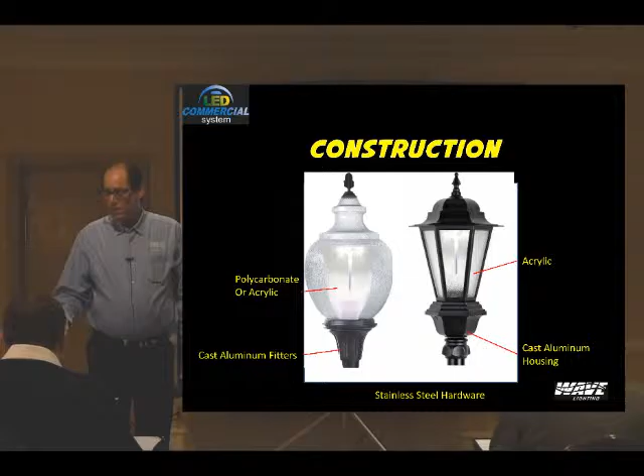Let's look at the construction of the WAVE fixtures. On the Acorn, we have a polycarbonate or acrylic globe, cast aluminum fitter. On the Lantern, we have a cast aluminum housing and acrylic lenses.

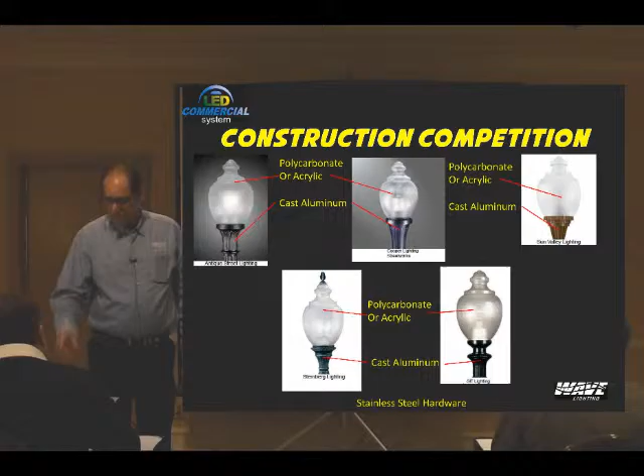But let's look at the competition. These are all the major competitors that you see out there. We have polycarbonate or acrylic globes, cast aluminum fitters. Both of us have stainless steel hardware.

Now we do have competition from the LED retrofits. And we're going to talk more about the LED retrofits in just a minute. Promoting commercial LED luminaires is different than residential. Showrooms sell design appliances that produce light.

Customers don't walk in a showroom and look at a chandelier and ask, how many foot candles will be on my table? Commercial outdoor lighting must complement the exterior design, and it has standards of functionality. Function is measured by photometry.

Photometry is the science of the measurement of light in terms of its perceived brightness to the human eye. Lighting levels are measured in foot candles and lux. Not so much lux, lux is more European. But 0.1 foot candle equals 1 lux, 1 foot candle equals 10 lux.

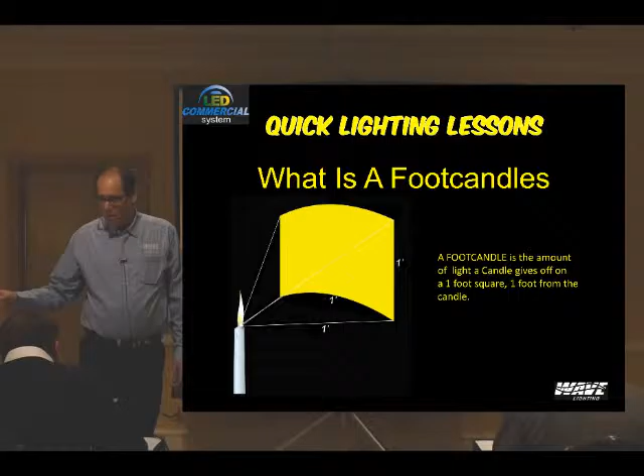Why photometrics? Safety, lawsuits. Photometrics are important. Architects and engineers demand them. Understanding photometrics makes the sale easier. Your knowledge of photometrics is paramount to success.

The Illuminating Engineering Society, IES, sets the recommendations for all indoor and outdoor lighting. Most projects must meet their requirements. Additional codes by state, county, and cities may exceed IES recommendations.

Architects, engineers, and cities may require a photometric report. Sometimes simple isolines and luminaire test results work. Sometimes a point-by-point layout showing the foot candles is required.

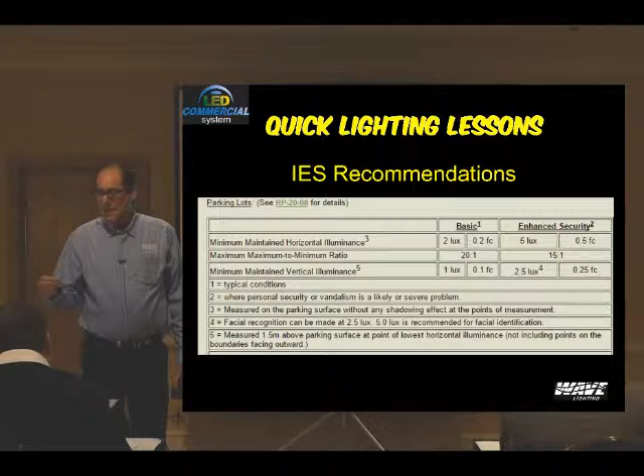The IES recommendations. We start with the basic. And when I say basic parking lot, we're talking about a very small apartment parking lot, and the recommendation is 0.2 foot candles minimum and a 20-to-1 max to min. Most of your parking lots are going to be minimum of 0.5 with a max to min of 15-to-1. So minimums are really going to range between 0.5 and 1 foot candle.

Max to mins must be as low as possible. The more even the light is, the less the eye pupil must adjust. With HID lighting, you get a tremendous amount of light going straight down below the pole. So your pupil closes. As you walk away from that post and the light gets dimmer, it now must adjust

and go up. If you have even lighting, like this room is right now, you can maneuver very easily because the pupil basically stays at one position. So low max to min, even lighting is superior to high max to mins.

To do a point by point, the following must be known. Got to know the pole height, the light source you're going to use, the luminaire locations. Or we can design a layout. But again, we need to know what's the post height, what's the light source, luminaire minimum foot candles required, any codes concerning the post height, lumen maximum, light trespass, etc. We need all this information.

Point-by-point photometric software uses AutoCAD DWG or DXF drawings. All jobs are done using AutoCAD, and they all can generate the DWG or DXF drawing and email it to you, and you can email it to us. We can do it and have done it off of PDF. The problem with the PDF is when we scale it up, the dimensions are going to be off a little bit, but we can do it.

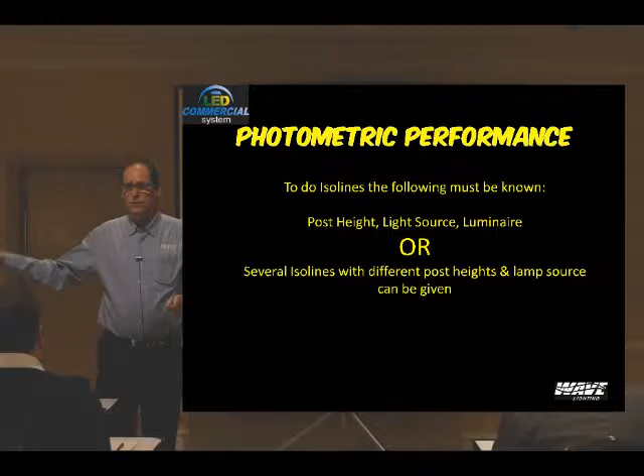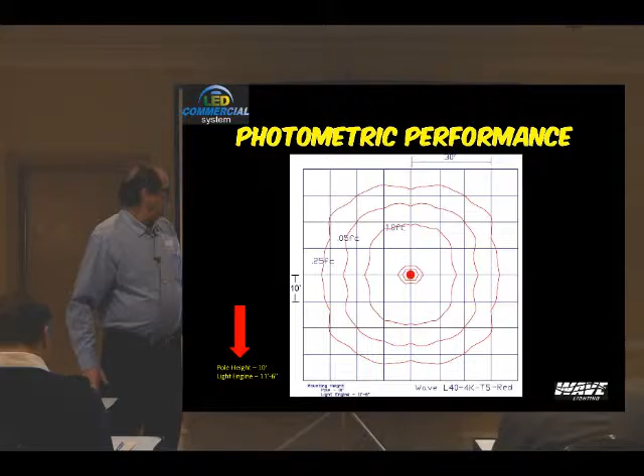But the real question is, how does the Wave LED commercial truly perform? Well, let's take a look at some isolines and point-by-points. This is our Type 5 40-watt LED unit, and you can see we're going out 30 feet away from the post to 0.25 foot candles. So that means to get that half minimum we talked about, the next post needs to be 60 feet away. Well, that's a great distance. Call that 6-to-1, mounting height to spacing.

Typical parking lots, 4x4; good fixtures, 5x5. We're going all the way out 6x6. That is great spacing. Now, the pole height in this case is 10 foot, but the light source is up 1.5 feet. So when we run the photometrics, the light source is running 11 feet 6 inches. You can't believe the number of jobs that are done at the wrong height because they're not taking into account where the light source is from the top of the post.

And now as we jump to our 60-watt LED unit, we're going out 38 feet 6 inches, so the next post for half-foot candle is 75 feet away. Again, that's a tremendous difference, and that can lower the cost of the job by using less poles and fixtures. That's all well and good, but everybody wants to know, how do you stack up against HID?

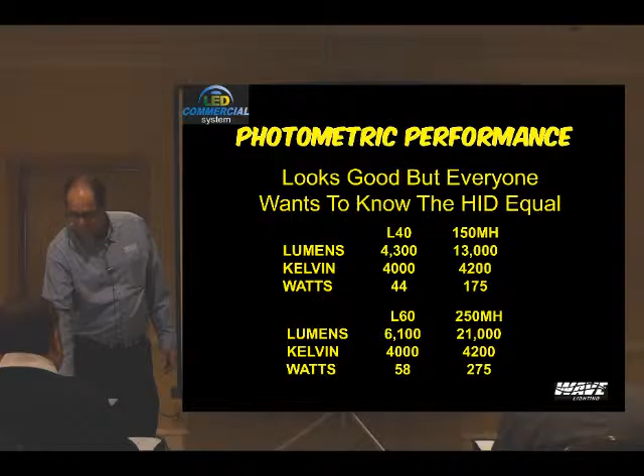Well, our 40-watt unit produces 4,300 lumens. 150 watt metal halide, 13,000. Kelvin temperature, we're at 4,000. Metal halide, 4,200. Watts, we're only at 44, while the 150 watt metal halide is at 175. On the 60 watt LED unit, we're at 6,100 lumens. The 250 watt metal halide, 21,000. Kelvin temperature the same, 4,000 to 4,200. Watts, only 58 against 275. But how can 1/3 of the lumens equal the same light on the ground?

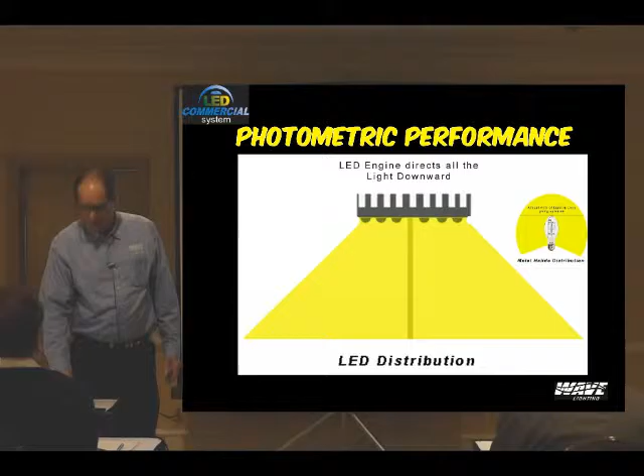This is how a metal halide lamp works. It basically throws the light out 360 degrees, vertically and horizontally. All that light going up, which is approximately 40%, goes up to the sky. You don't need it. Oh, you also, by the way, have a point source. That little bubble in the lamp is called a point source. It's going to become important later. Don't forget that point. On our LED, all the light's going down. That's why we can use less lumens and get the same amount of light on the ground. And there's your comparison between the two.

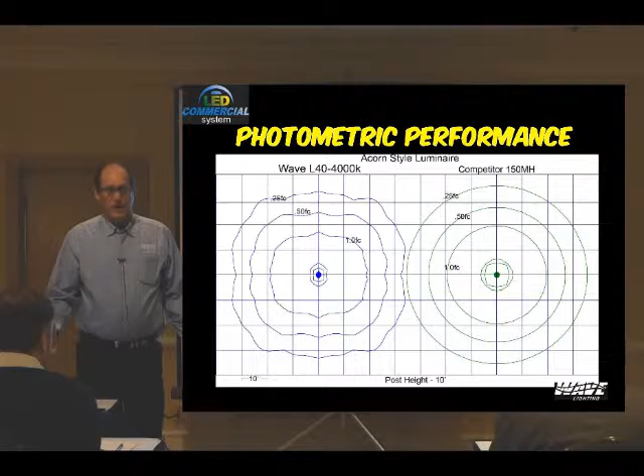But the real proof is running isoline photometrics and comparing. On the right, I have a major competitor with a 150 watt Acorn luminaire. On the left is our 40 watt LED unit. They're both at 10-foot height. When I do an overlay, you can see they're virtually identical.

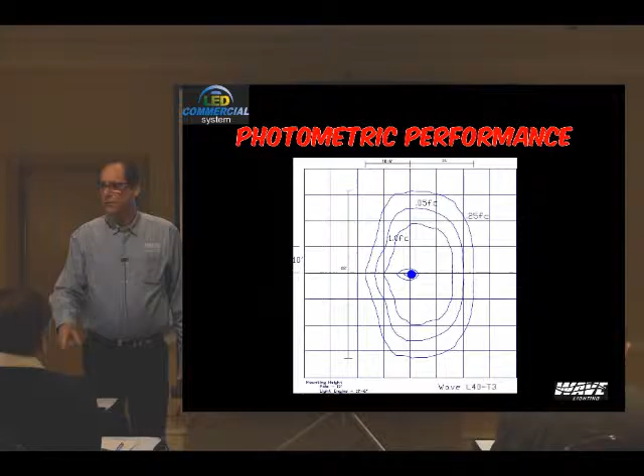Now this is our type 3 distribution. It's not a good type 3. It doesn't go out far enough away. It's fantastic distance side to side. We're getting 62 feet, which means the next post for that half-foot candle needs to be 60 foot away. It's closer to a type 2, but it is a great item to use when you have a driveway. You got a multifamily, you're driving in. They're narrow, sometimes 20 feet. That's great optics for that. You're not getting a lot of light trespass.

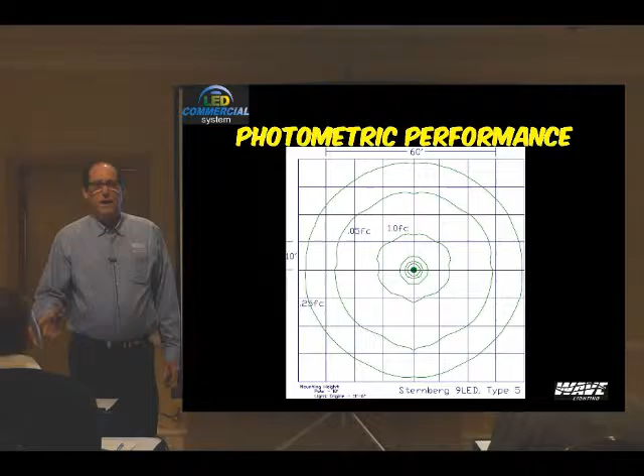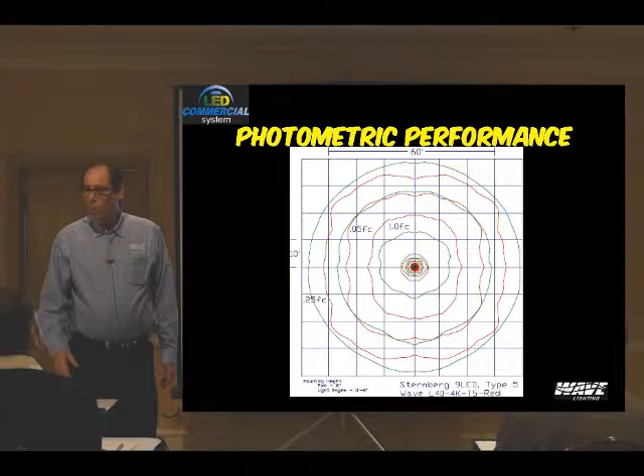But you got to compete against other people out there. So how do we compete against the best of the best in the marketplace? Great question. I'm glad you asked it. So this is a major, well-known, very respected competitor. This is their approximately 40 watt LED unit. I do an overlay of our unit and you can see quickly that on the 1-foot candle isoline, which is on the inside, we're a little bit better. On the half-foot candle, we're almost identical. On the 1/4-foot candle, they exceed us a little bit.

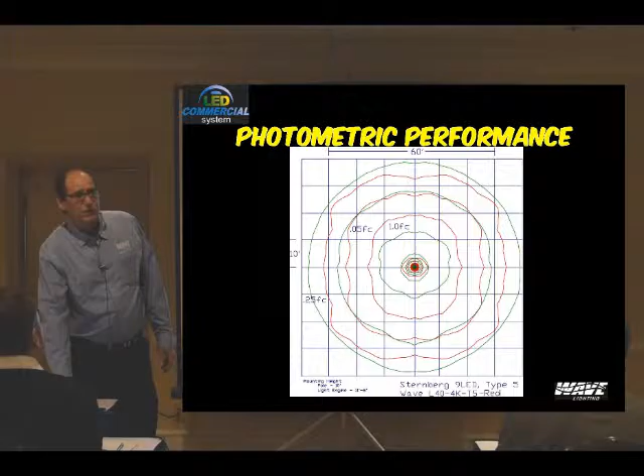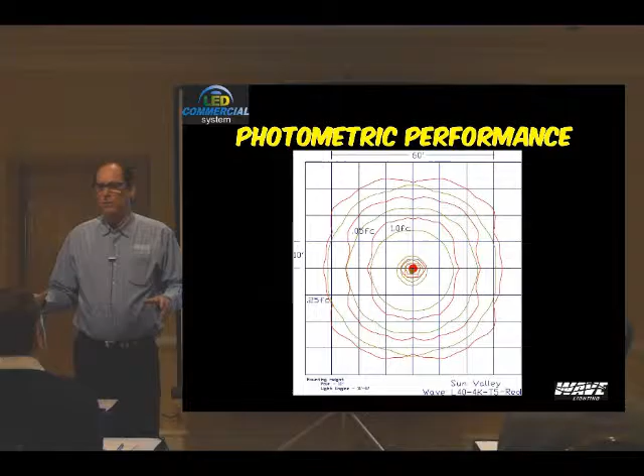Took it one step farther. Another national competitor. This is their type 5, approximately 40 watt LED unit. Do our overlay. Again, on the 1-foot candle, we're a little better. Half-foot candle, we're better. And the 0.25-foot candle, we're better. But you put any one of those three on a plan, and they're virtually going to come out identical. They're that close. When you look at it one-on-one is where you see the difference. When we have multiples, you get all the other contributing light, and they're virtually going to be the same.

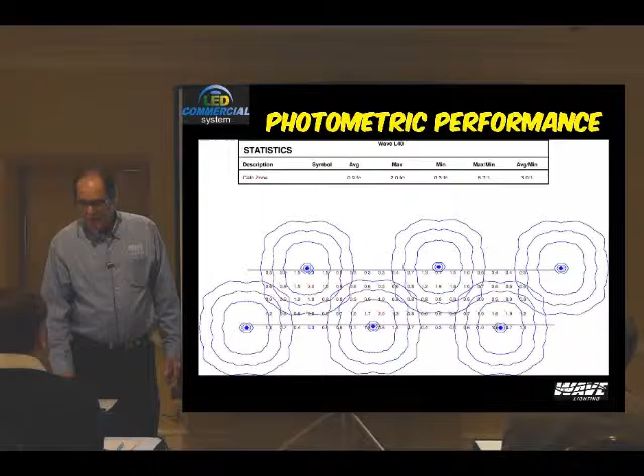Here we did a little street lighting. It's 40 feet across. Ran 6 units. This is with a metal halide unit. We're getting an average of 1.3 foot-candles, max 5.2, minimum 0.4. Ran our 40 watt unit. We're getting an average of 0.9, max of 2.0, and a minimum of 0.3.

But let's stack them up next to each other. The Wave unit, 0.9 as I mentioned. The metal halide, 1.3. Your eye can't really tell the difference between the two. On the max, we're at 2.0, they're at 5.2. Remember we talked about that max to min? We're 2.5 times better. The minimums, 0.3, 0.4, you can't tell. The eye can't see that.

Max to min, because of the max, we're at 6.7, they're at 13. We're almost twice as good, better than the metal halide unit, because the metal halide dumps the light straight down. We're using 1/4 of the energy and better lighting.

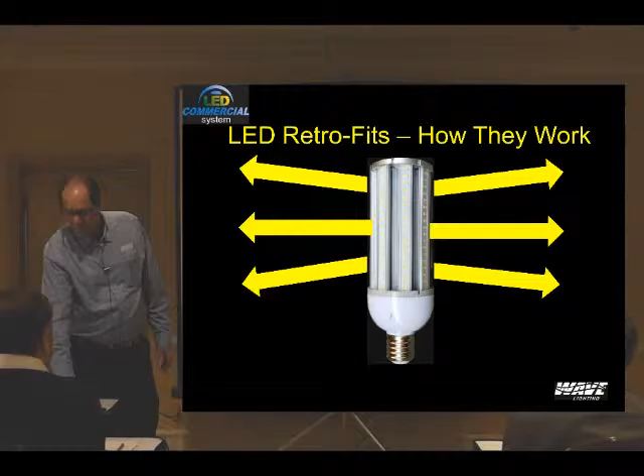The LED retrofits, very popular. A lot of you have sold thousands of them, have made nice money on them. How do they work? They shoot the light straight out. The only difference between them and a metal halide is there's very little light going above 90 degrees. But where do we want the light? We want the light going down. Light should go down so we get the good foot-candles. That's what people see. They don't walk up at 10, 12 feet in the air.

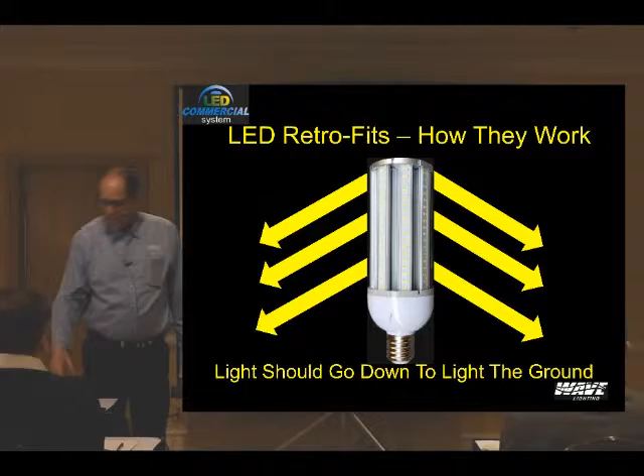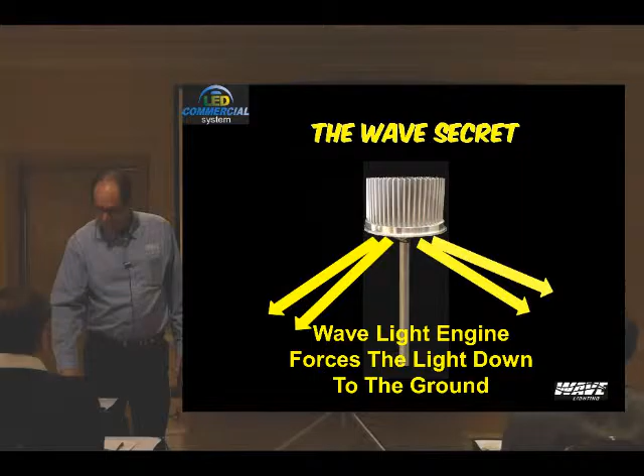The Wave Secret, there's our module. Again, all the light is going down. Now, we use superior optic control, ultra-high output LEDs, and we have quite a large heat sink to mitigate the heat out of the unit. Our standard is 4,000 K. We do offer 3,000 and 5,000 options. 5-year warranty, multi-volt driver, 100 to 277.

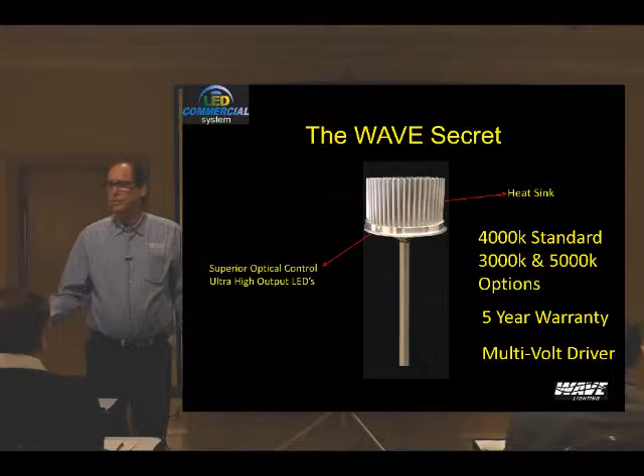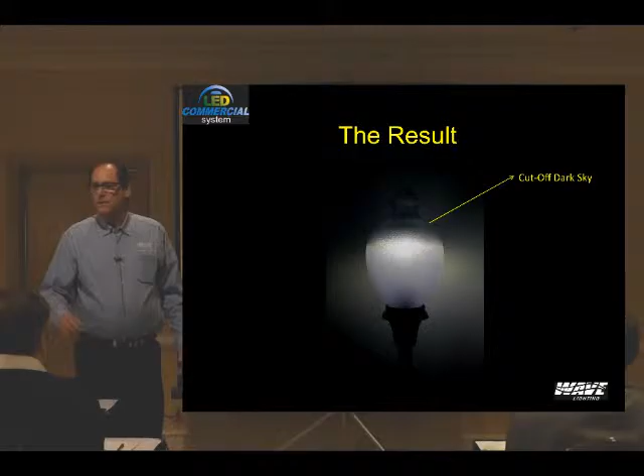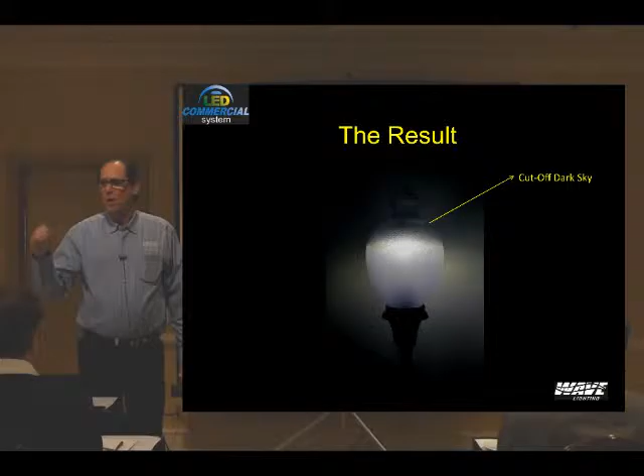This is what it looks like when you light the unit. Now, we are getting a little light going above 90 degrees. That's a reflection from the globe. Light reflects, and that's where it's coming from. There have been manufacturers that say, oh, I got an Acorn, no light goes above 90 degrees. It's impossible, because you're always going to get some reflection going up. But you can see here we're getting very little. All the light's going down, and you can see the angle.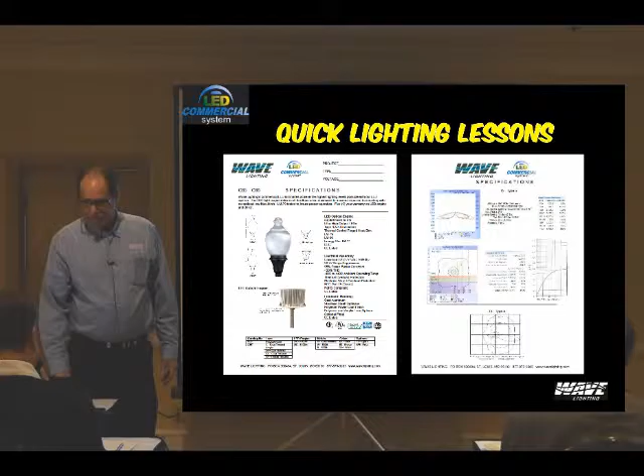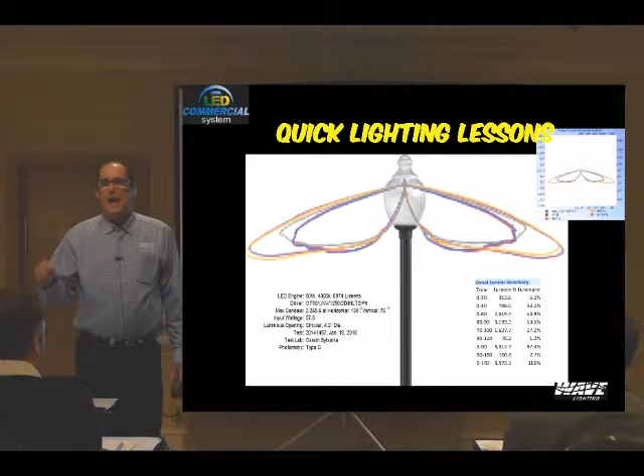Knowing how to read photometric isolines, point by points, and graphs is important. This is our brand new specification sheet for our commercial LED products. And on the back, we have some photometrics. So the first one on the top is what's called the polar candela curve. What this is telling us is the intensity of light and the angle it's coming out at. To make it easier, I dropped in some degrees. So you can see at 30 degrees, we have very little coming out. It's closer to the luminaire.

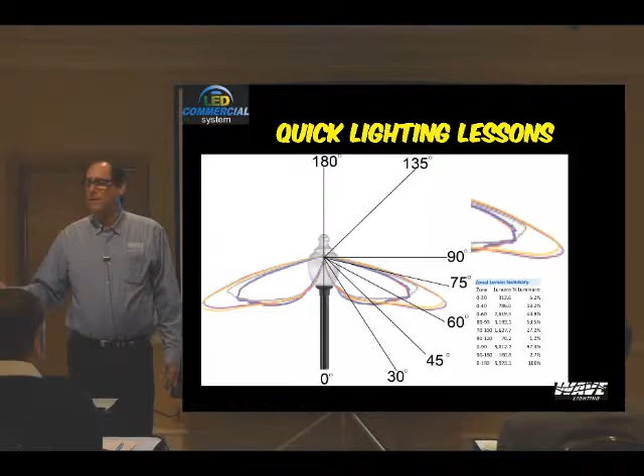We don't need as much light as between the 60 and 75 degree, where we're going farther from the post and we need more intensity. That's how we can get those large distances. And in this particular case, it is tested within the Acorn, so we are getting a little light coming above. And what we're getting downward on this unit is 93.7% of the light, 97.3, going in the direction that we want it.

And then we have an isoline on there. Again, this is plan view, so you're looking down on the fixture. This happens to be obviously our type 5, because you can see it's square. Now, the important thing on this one to understand is there's what's called house side and street side. In a type 5, it's not important. In this case, we're getting 48.9% of the light on the street side, 48.4% on the house side, virtually identical.

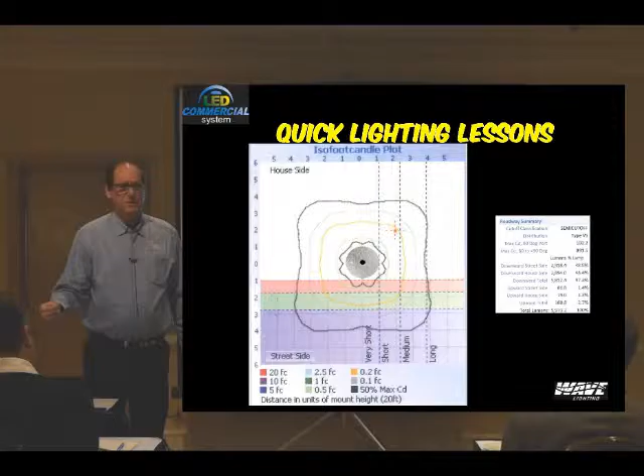But if we had the type 3, there would be a difference. If you get a call and they go, all the light's going into the apartment buildings, no light on the street, guess what? The installer installed it backwards. He didn't put the light going out street side.

And then finally, on the type 3, we're combining both an isoline and a polar candela curve. And as you can see on the upper left, what we have there is the type 3 coming out, so you can visualize that there's a fixture there and very little going on the house side. Down below is the isoline. So a lot of the information you need, and you can quickly, if you're going up against another manufacturer, look at their curves and look at our curves and see how they compare.

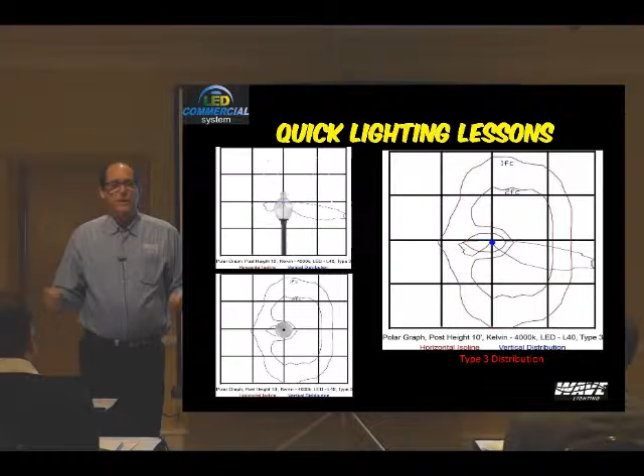Now, there are a lot of competitors in the outdoor market. We've gone through some of these majors. Others include Sun Valley Lighting, Visionaire, HCI, King Luminaire, a company called Neptune, and there's quite a few others out there.

Comparing pricing is very difficult. The majors are typically $750 to $1,100, but these companies offer photometrics, design layouts. They're well known to engineers and architects, and they're known for quality products. The B players, pricing comes down a little bit, typically $550 on the low end, upwards to $1,000 on the high end. These companies do offer photometrics, design layouts. They're not quite as well known to the architects and engineers.

And then you have the C players. And these companies give you very little information. I've never found one that has photometrics. And their pricing is $350 to $750.